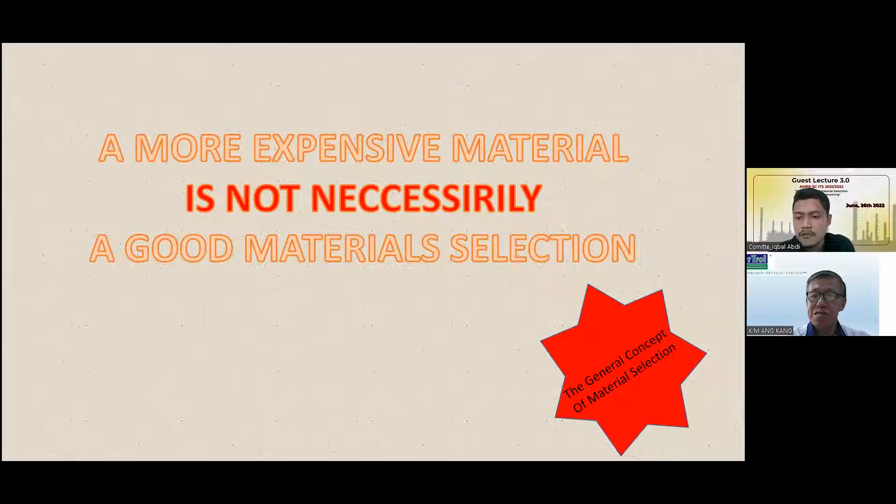Now, I would like to start this lecture with two stories first - real stories that I came across through 20, 30 years - with the hope that we can understand that when we want to choose a material, price itself will not really guarantee us that we have a good selection.

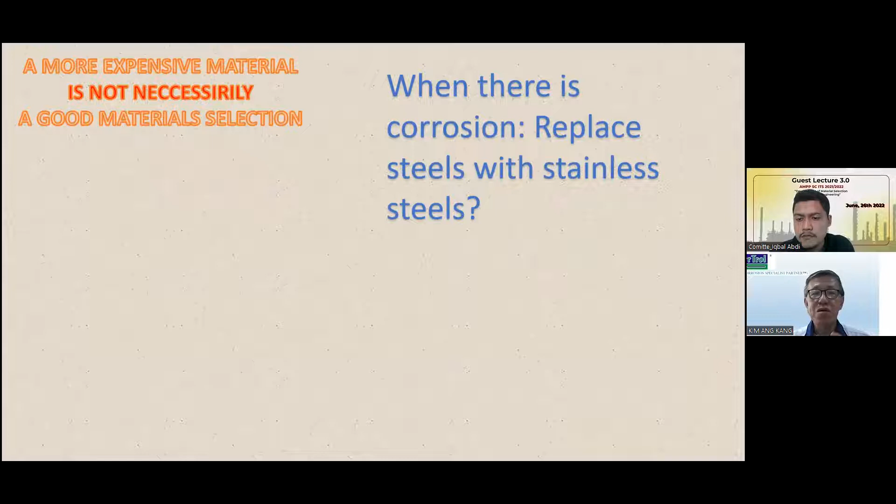So one of the common things we normally do, as a layman at home in normal life, we started by using steel, carbon steel. Whenever we have a problem with carbon steel, most of the time what we think of is to replace the carbon steel with stainless steel. So most laymen will think that way, and it's not really wrong. If we go back home, go to the kitchen, the dapur, we look at whatever we use made from carbon steel or mild steel. When we have a corrosion problem in the kitchen, we replace it with stainless steel.

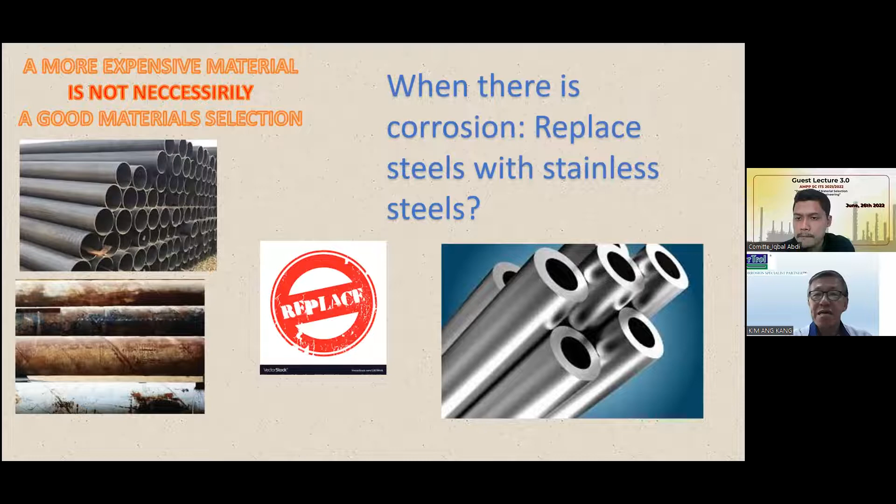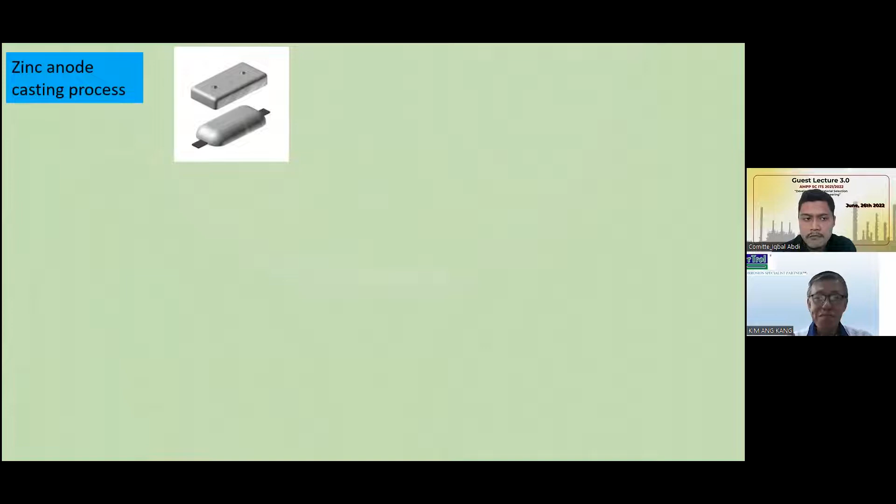Now back to this - the concept that a more expensive material is not necessarily a good material selection. Let me recall a real case story from more than 25 years ago, minimum. I was working for a CP company, and this CP company made zinc anodes. Zinc anodes are used for cathodic protection, and a lot of this application is on ship hulls. So the company has a foundry producing zinc anodes, and when producing zinc anodes, we have all this furnace and crucible - we have the furnace and crucible.

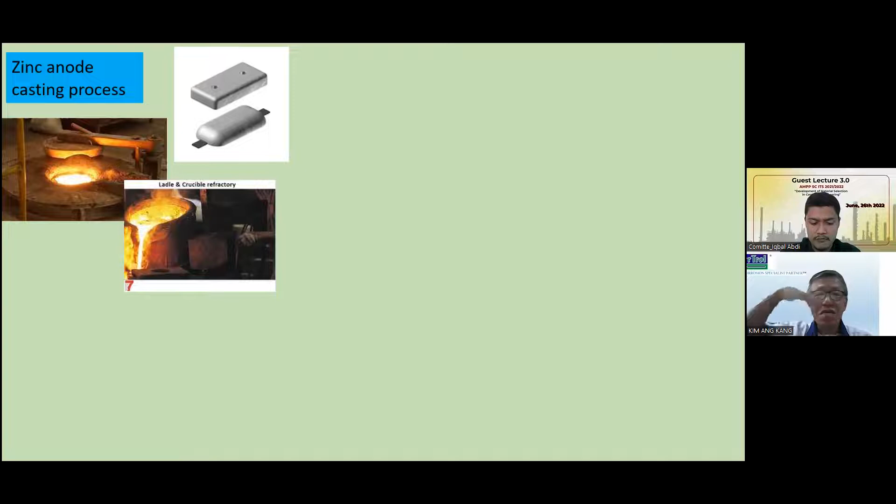Although we call the anode a zinc anode, it has an activating agent in it. So the anode, although we call it zinc anode, is not 100% pure zinc. It has an alloying element that we have to add in to activate the zinc, so that the zinc will act as the anode to sacrifice itself to protect the structure. So the common ingredient for zinc anodes is generally cadmium. So when we are melting the main part of the zinc ingot with cadmium, we need to do stirring. We need to stir before we can do the casting into the mold and make it into this shape.

Into this shape here that we can see. Yep, so to stir this, a metal rod is used. It's just like making the kue raya—we mix the anodes with the alloying element, using this stirrer rod to stir the molten anodes before we can cast into this.

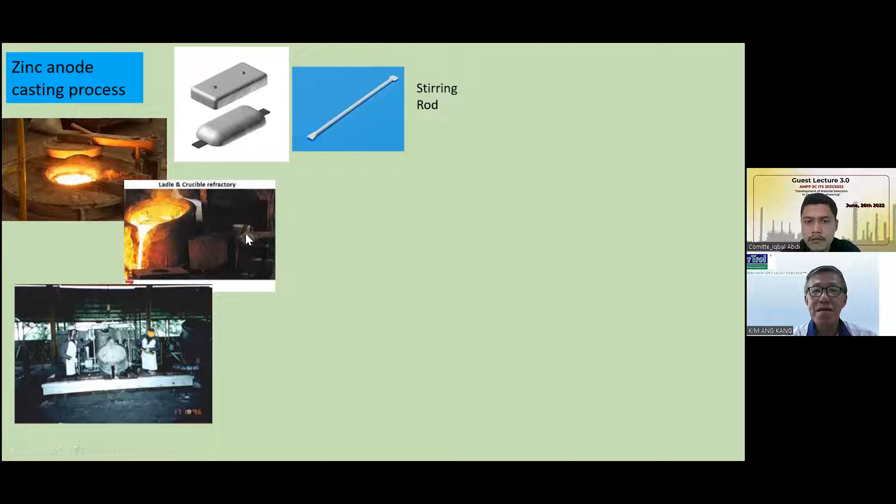So what happened during that time? The production manager was quite upset because the rod used to stir this molten metal was originally just a steel rod coated with some ceramic coating. He got upset because this rod could not last very long—almost every 10 times around, he had to replace it.

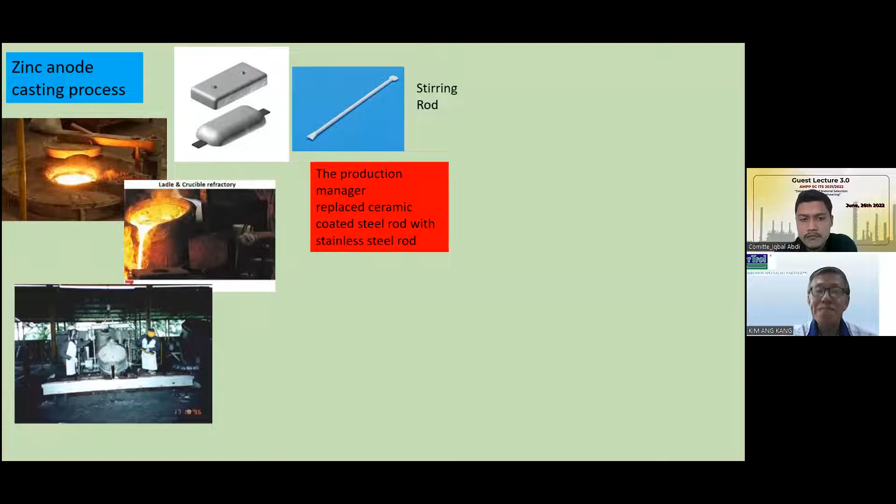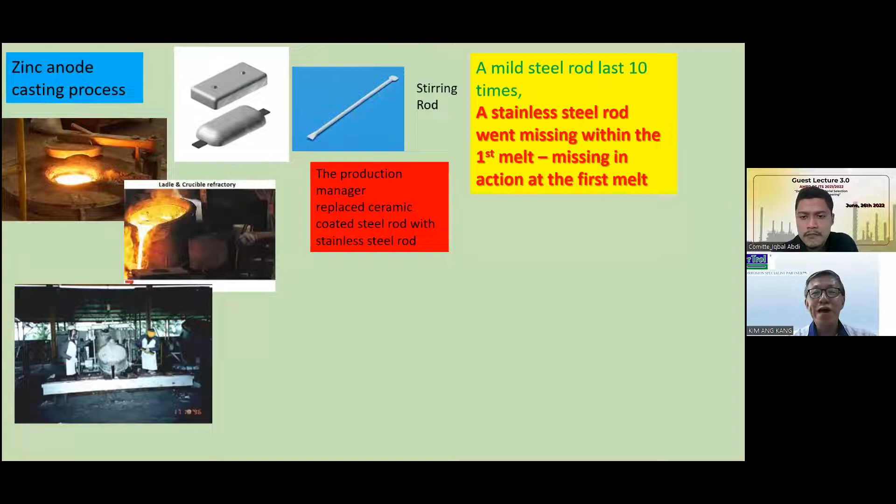He saw it as a corrosion problem. So as a common layman term, when we have a problem with carbon steel, the next thing we always think of is stainless steel. So he went ahead to find a stainless steel rod to replace the carbon steel rod. When he used the carbon steel rod, it lasted about 10 times of stirring. However, when he changed to the stainless steel rod, it went missing after just the first melt.

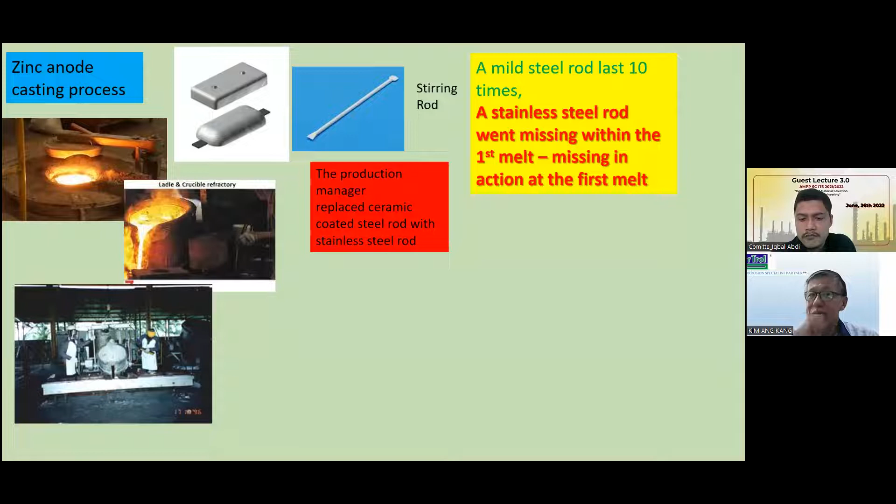So this is one example of the mistake we could easily make when we use a more expensive stainless steel to replace carbon steel, but end up with more disaster. This is one of the general concepts we always have to tell ourselves from the corrosion protection perspective when it comes to material selection: do not fall into the trap of thinking a more expensive material is always a better material. No—this is one example.

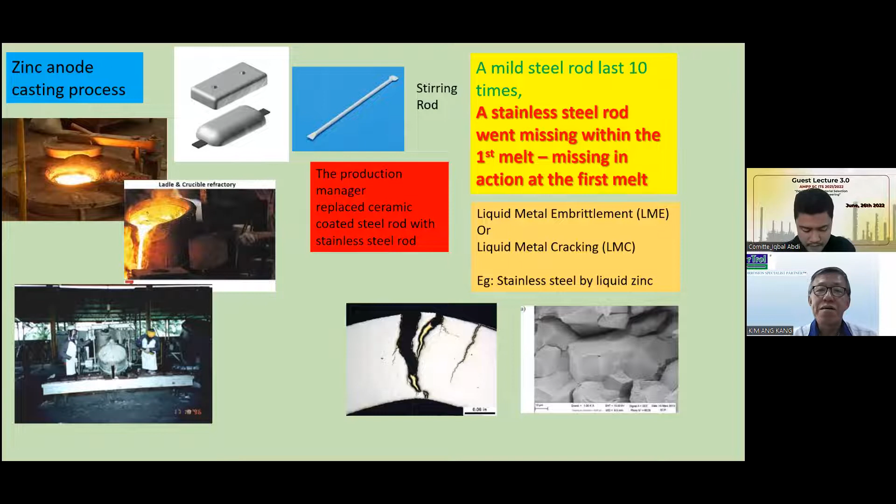Yep, so let me go to another second story, where it happens—this is also, sorry, a story from about 20-odd years ago. The real case happened when, one fine day, I received a call. It was quite early morning. I received a call from a friend with whom I worked together on one of the cross-country pipeline projects. We were together on the same project.

Then I left the company. He left the company after the project completed—I left before the project completed. Then he went to another company. One fine morning, he called me. His name is Mr. Chong. He said he had something he could not understand, so I asked him what happened.

He said he was involved in a new project building a petrochemical plant—an MTBE plant, actually. His project had storage of stainless steel piping at the open yard, uncovered, because stainless steel, in our general understanding, is not going to rust, especially under normal rainwater in temperatures like in Indonesia or Malaysia, where there's almost no difference in temperature and weather. So the stainless steel had no sign of corrosion at all.

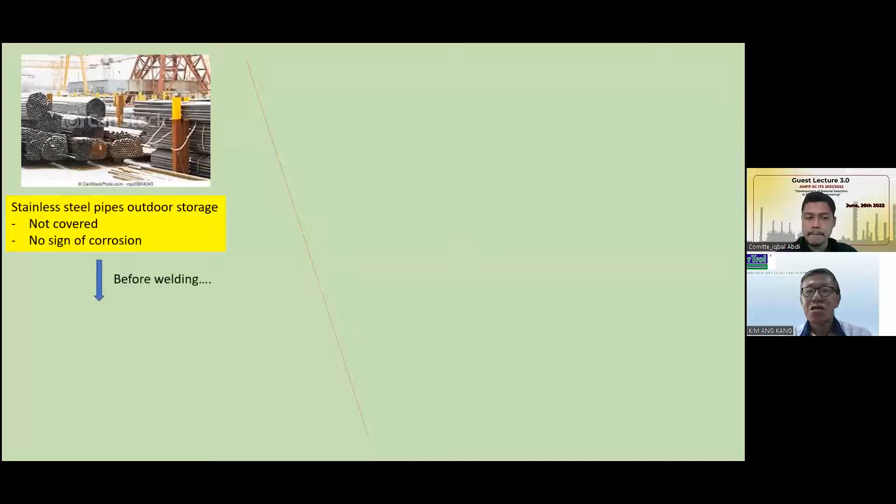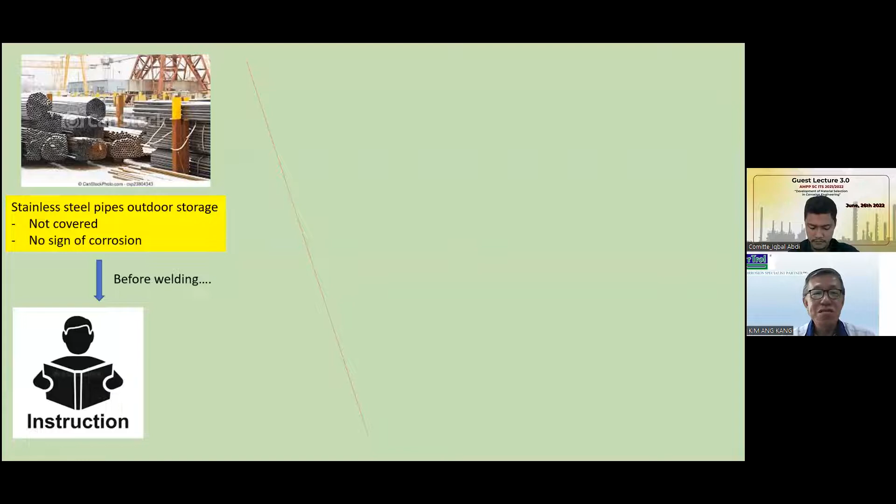So then, one fine day, they wanted to install the stainless steel. After the storage period, before the welding work began, there came an instruction from the project manager—an Italian project manager—instructing them that before they do the welding, they should wash the stainless steel with acid first, then wash the acid off.

Now, this Mr. Chong was puzzled. He told me that the stainless steel had no problem in the outdoor environment—those stainless steel pipes had no sign of corrosion at all. So what was the problem with just taking it and welding it? We just could not understand. But the Italian project manager said to wash it with light acid and then wash the acid off.

It was quite massive work for them to remove the piping from the storage deck like this, so he could not understand why they needed to do that. However, they didn't get a clear explanation from the Italian project manager.

Then when he called me, since I am in the corrosion line, he asked me, what is the explanation? What is the logic behind? Why do they need to wash this stainless steel when there's nothing wrong at all with this stainless steel?

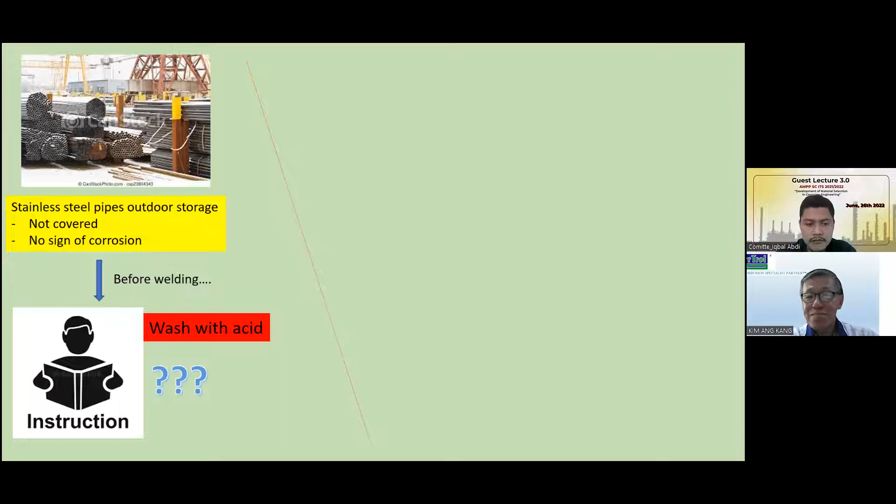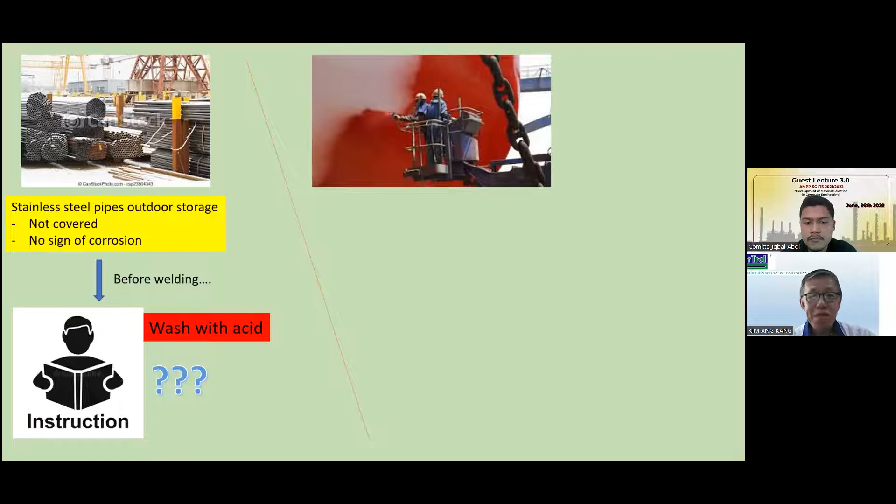So I started to ask him, because the stainless steel is stored at the open outdoor, whether the project has painting work or not. His answer is yes. There's painting work around that area. Then I asked him, are you aware any of those painting systems typically has a coating system started with zinc-rich primer?

Now, zinc-rich primer, if you get to know a little bit of protective coating in the industry, when we call it protective coating, it is referring to a corrosion protection coating. Because otherwise, when we think of painting, we just do decoration. Those are more decorative coatings. But protective coatings are mainly for corrosion protection. So one of the most common protective coatings contains zinc-rich primer.

So I asked him, is there any zinc primer that could possibly be applied inside? And his answer was not sure, meaning that it was possible. So I told him, if that's the case, you have to follow the instruction from the Italian project manager. The logic here is that the stainless steel has no problem. The painting itself has no problem. The zinc-rich primer itself has no problem as well. The problem will come later on.

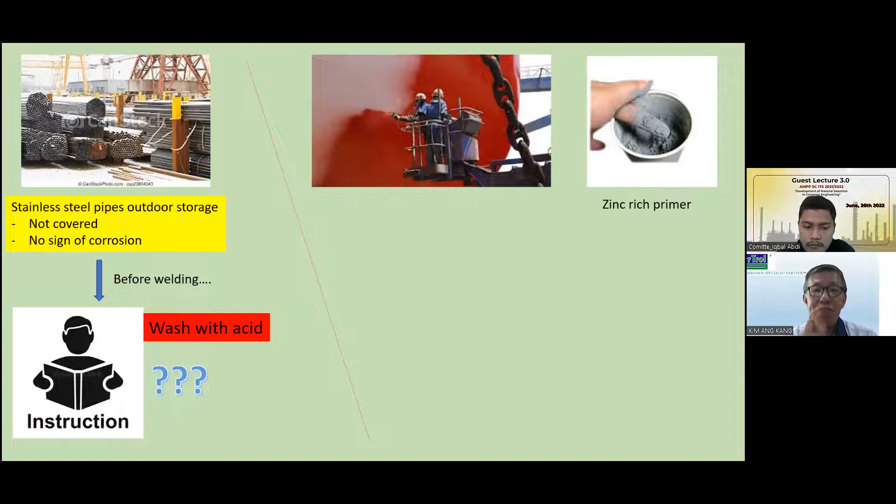Let's look at this. Zinc has a relatively very low melting point, about 420 degrees C. Now, when I want to weld the stainless steel, just a normal grade, because there is a long range of stainless steel grades, in general the melting temperature of stainless steel will be about 1,400 to 1,550 degrees C. To compare, stainless steel melts at 1,400 to 1,500 degrees C, while zinc melts at about 420 degrees C.

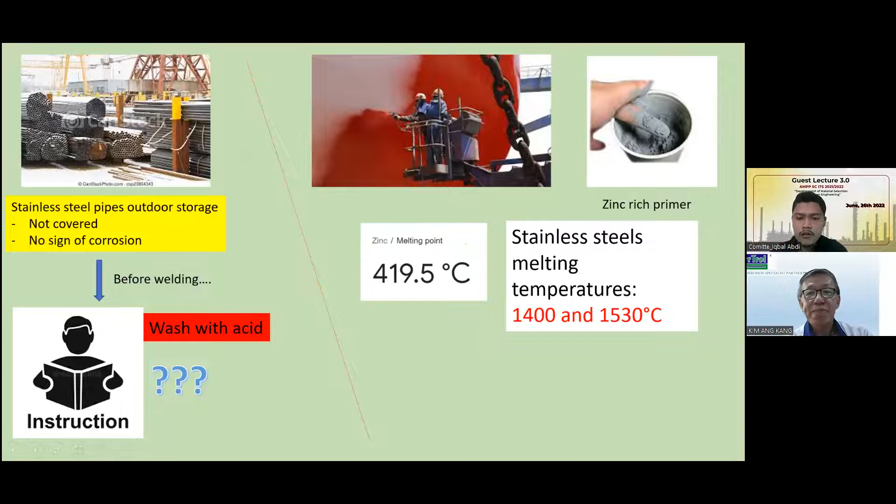Imagine the zinc dust in the zinc-rich primer, during spraying outdoors, flew over and deposited on the stainless steel. The deposition of the zinc dust on the stainless steel probably will not cause any problem yet. The problem is waiting. Imagine if we started to weld the stainless steel with the dust on it. What happens to the zinc dust?

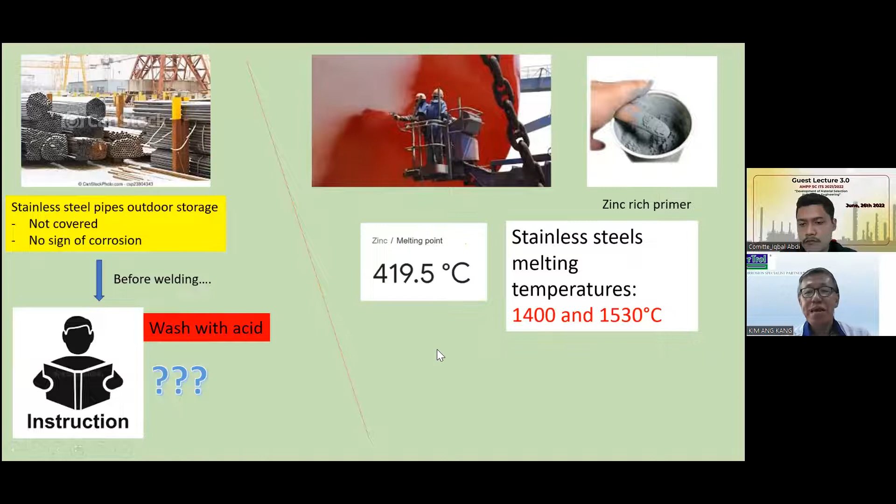It means the zinc dust will be melted before it comes to the welding temperature. Probably the preheat temperature is already enough for zinc to melt before reaching the melting temperature of stainless steel. So once welding of the stainless steel is on, this zinc dust will turn into liquid zinc. And that is where the problem comes, like what we watched in the movie Terminator 2, which symbolized a very typical liquid metal.

A metal in liquid form at atmospheric temperature, so far as I know, is only mercury. So that is another real case story: when we select materials, we have to be aware of things other than the material itself. We have to know what processes are coming around. So the Italian project manager gave a very good instruction before the problem happened.

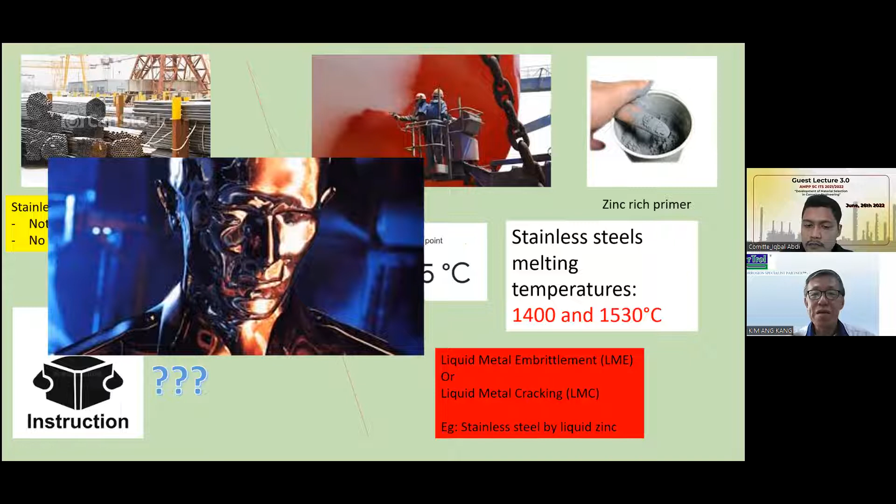In this case, we do not see the problem happen when zinc dust is zinc dust and stainless steel pipe is stainless steel pipe. The problem only comes when welding takes place on the stainless steel piping where the zinc dust could be deposited. So these two stories are just for us to begin with the concept of what factors and considerations we have to look at in material selection.

Now, in a very common view of material selection, these are the triangles of material selection that we'll consider. In the real industry, the bosses will be most particular about the cost. So we have to think of the cost, and we also have to think of how we can get these materials.

For example, like Indonesia now, you have a great advantage because of your nickel mineral reserve, where I was with Tigor on one of the projects in Sulawesi. We had a project in the nickel plant in Sulawesi. So we have to think of the availability of the material as well.

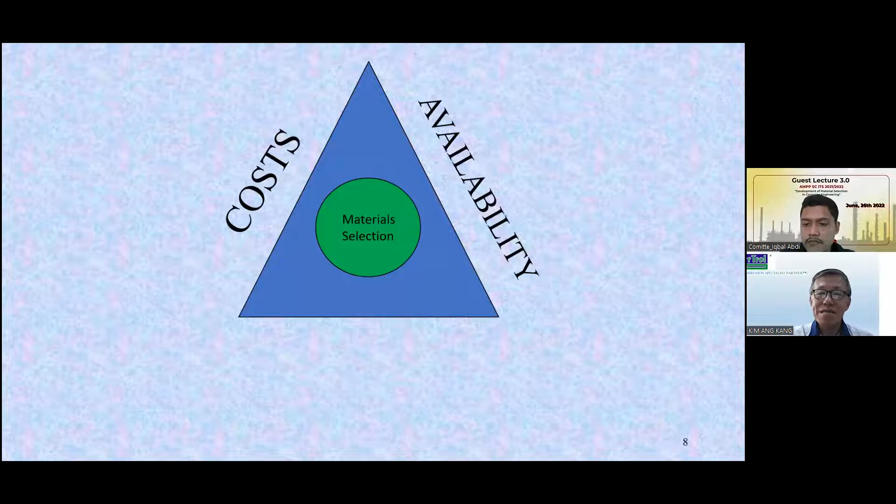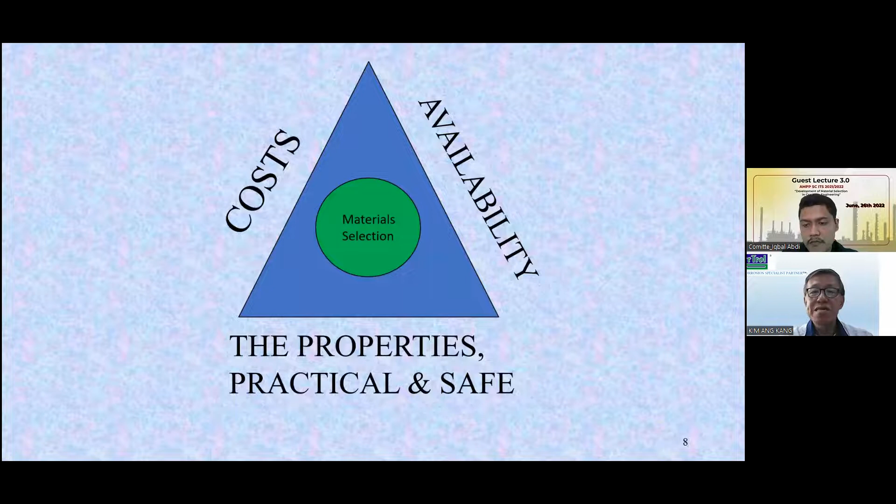And last is the practical part of it. We have to understand the properties. We have to understand the practicality of using these materials, and also have to make sure that this material is safe to be used in that environment. Safe in the sense that it will not fail unexpectedly. Safe also in the sense that it will not cause environmental issues, because now this has become more and more a key concern in a lot of engineering considerations.

Now, let's look at the cost. If we look at the cost of material itself, if we do not consider the cost, we just consider corrosion protection, let's take some example here. Now, most of the time, I and Pak Agus as well, and Iqbal and Tigor also, we are dealing a lot with pipeline. So this is one of the old maps of the pipeline within these few countries in Southeast Asia.

We knew that there are two pipelines going into Singapore from Sumatra, and also from your Natuna to Singapore, and in Peninsular Malaysia we have this cross-country natural gas pipeline, and over in Borneo we have the pipeline crossing over 500 kilometers. Not to mention what you have over Kalimantan and crossing over to the island of Java. So I was involved in one of them, I remember it's a 24-inch natural gas trunk line in Sumatra as well.

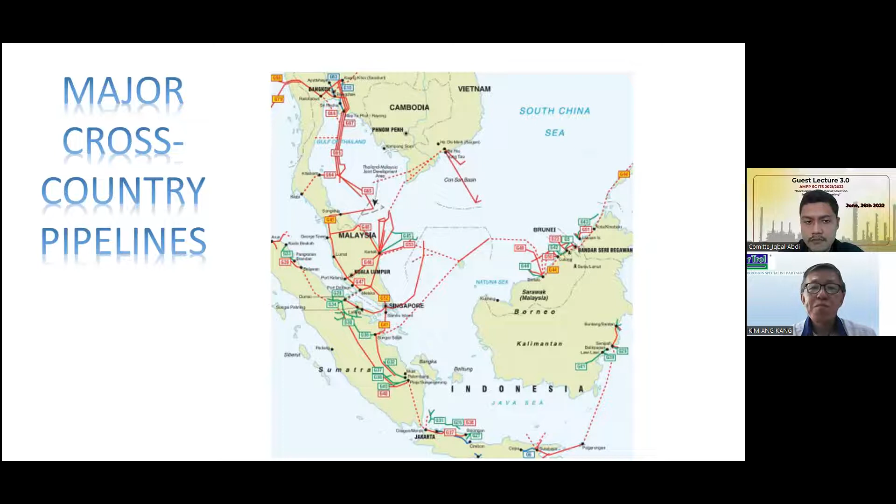So if we do not consider cost, just consider the corrosion protection, can we use gold, because we want to have corrosion protection, to construct this type of cross-country pipeline? Certainly in your mind, this is no. Otherwise, anyone who goes to cut a piece of this pipe will become a millionaire without working hard. So we say this is no.

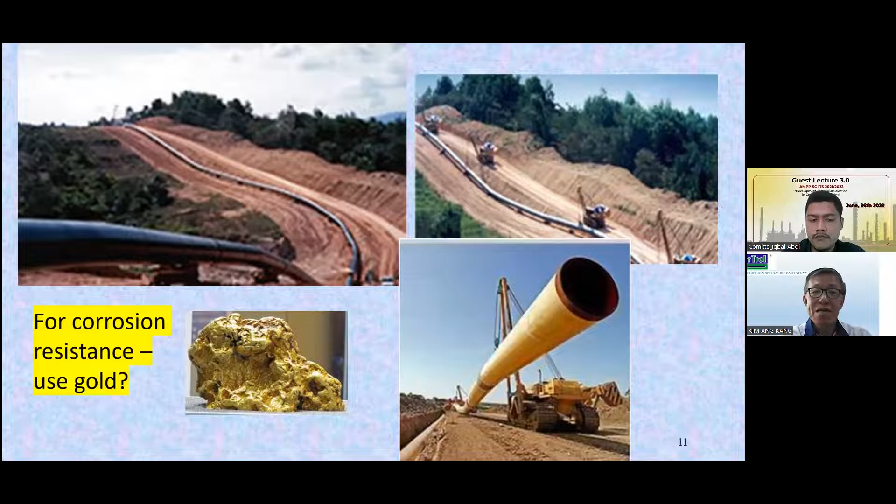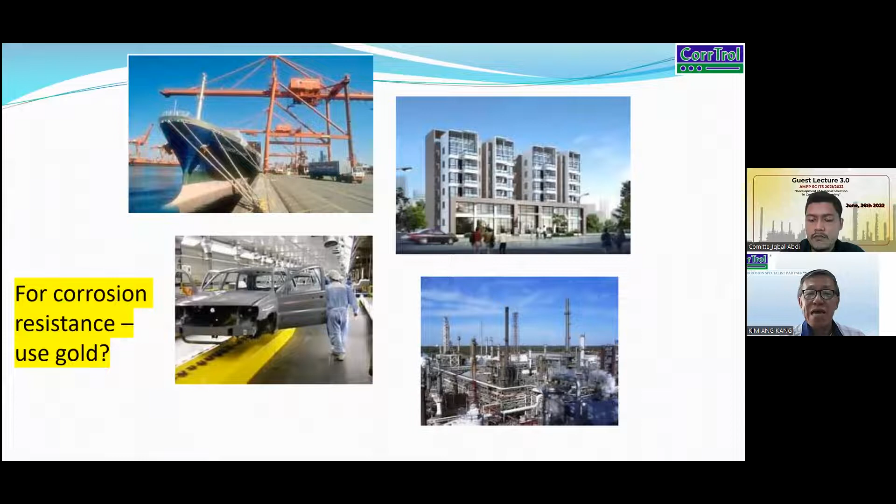And for other construction, as engineers, we know that we always have the challenge to make something happen within the cost, within the budget that we have. So imagine that these are the constructions that we are dealing with. And for oil and gas exploration onshore, we see a lot of this driving from Pekanbaru to Duri. Not to mention that both Indonesia and Malaysia have a lot of offshore platforms, and now those mega ports. If you go to your Batam Island, you have a big port over there.

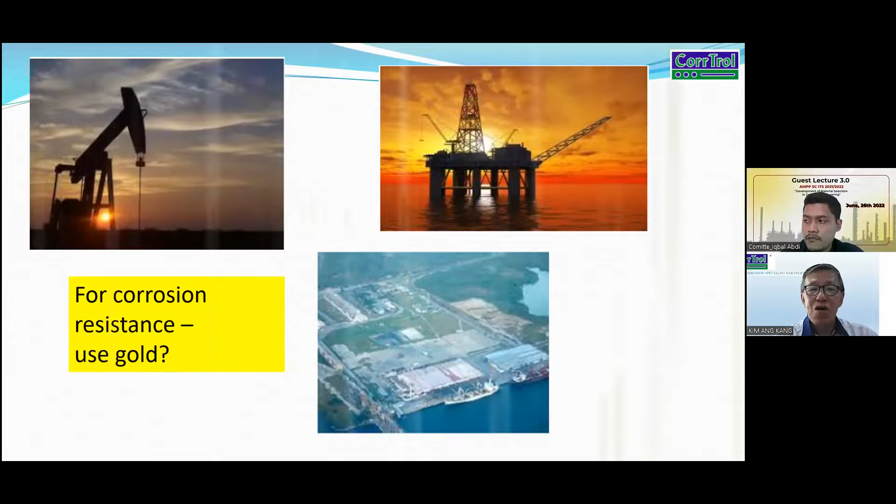So imagine, how could we afford to use gold just because we wanted to have corrosion resistance? So it is no. We always have to consider the cost that we need to incur to select these materials. Now, if the answer is no, what else should we consider when we want to do the material selection? For the cost factors, these are some of the things that they think of as cost.

First of all, of course, is the raw material cost, and the processing cost. We may have the raw material, but the processing cost could be very, very high, or the raw material probably does not need a high processing cost, but it could end up with a very high raw material cost itself. Not to forget, of course, the production cost and the production requirements: whether it involves welding, what sort of welding we need, what sort of fabrication we need, and the kind of manpower skill.

Welding is a huge process to be involved, with various setups. We have to make sure that this could be set up for the fabrication and the production of the metal. So we cannot simply say, I want that, when the whole production cost could be very, very high and impact the project cost. And not to forget is the life cycle cost, which means that we do not want to select something that is cheaper at this moment, but does not last long enough or meet the budget requirement.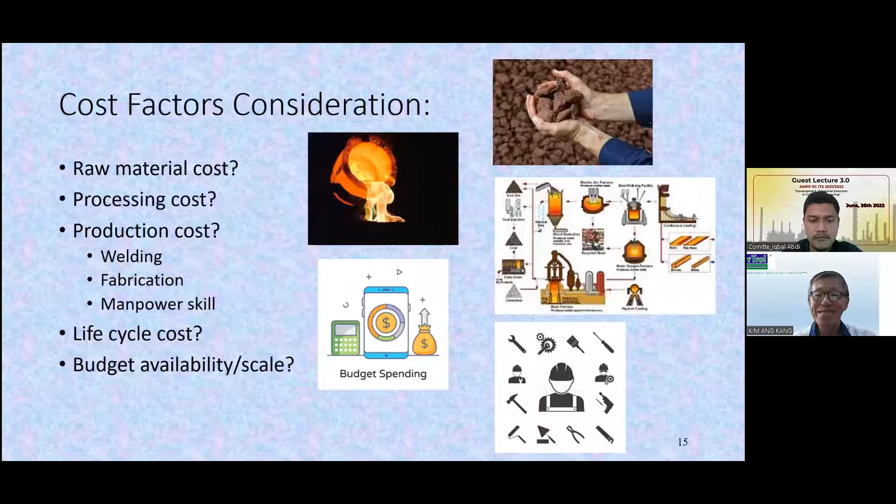So when it comes to availability, first of all, we have a project to meet. We cannot select materials where a project needs to be completed in 2 years, but this material can only be ready in 3 years' time. So we have to consider whether the material is ex stock or ready stock, and can the material be delivered or be produced within the project schedule. So we need to finish a project within time. That is the real world.

So at times we need to tailor-make certain parts to the size or the dimension or the shape of what we wanted to use. How possible can it be formed in terms of the size, the shape, the texture, the profile?

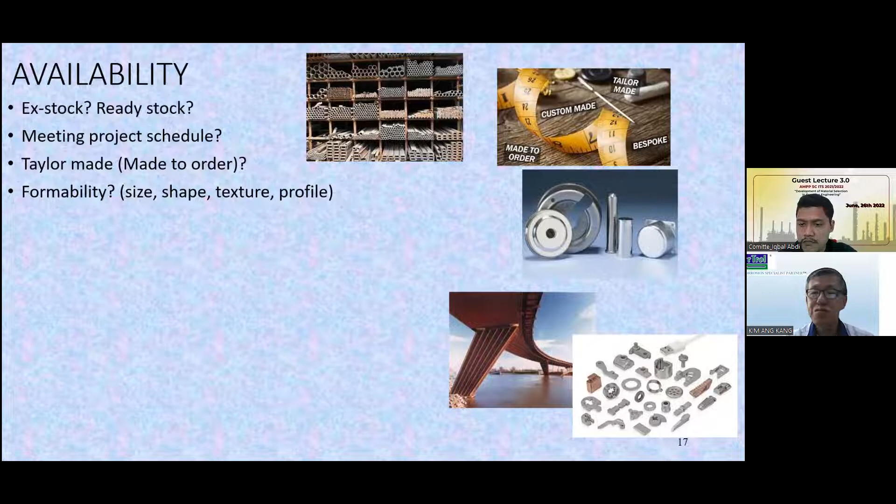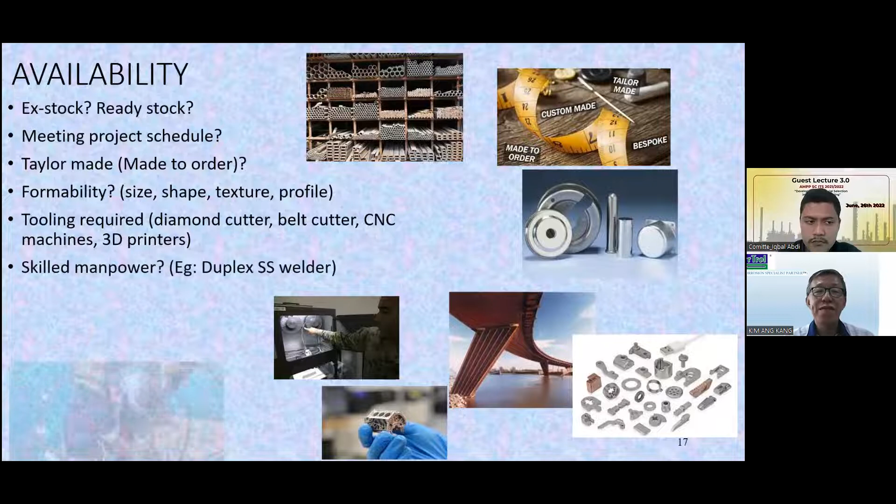And some of the parts could be that tiny. And sometimes we only want one piece. So the factory will tell us, no, we are not going to produce one piece for you, because a factory is a factory. So we have to think of any special tooling that is required. And now, especially with 3D printers coming about, a lot of small quantity orders could possibly be tailor-made too. So we have to think of whether this can be produced by the factory. If not, can this be produced using 3D printers? So these are some of the things we have to consider: the availability of the product, the parts and the material we want to select.

Now, the other one is the requirement of skilled manpower at the construction site. One good example is the duplex stainless steel welder. What I remember when I spoke with some friends, there was an incident before in the whole Southeast Asia where we could not find a qualified welder who could weld the stainless steel at site. So imagine if we select a material which is a good material, make sure not only of the availability of the material itself, but not to forget the availability of the skilled manpower. So if we want to buy a specified duplex stainless steel, in the back of our mind we also have to consider how that construction is going to be.

If that needs a welder, we have to think, can we get a welder to come in to do this welding or not? Worse still is if this is underwater welding. Underwater welding will have a lot more other factors to be considered at the same time, other than the material itself: the underwater setup, the depth where the work is going to be carried out, how to protect the divers from the pressure. So we need a decompression chamber to protect the welder from getting the pressure problem in the blood. I can't remember that term.

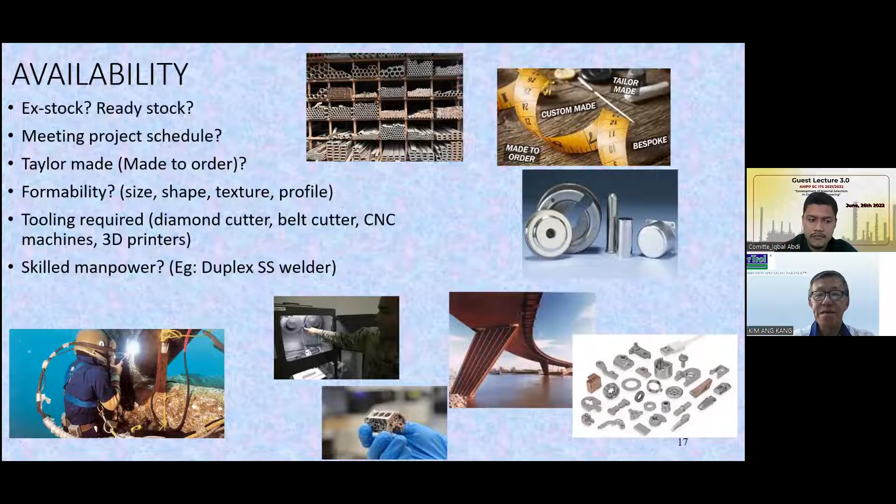So now, a more wider perspective to look at material selection is to look at the properties, the practicality, and the safety of these materials. So I have more slides here.

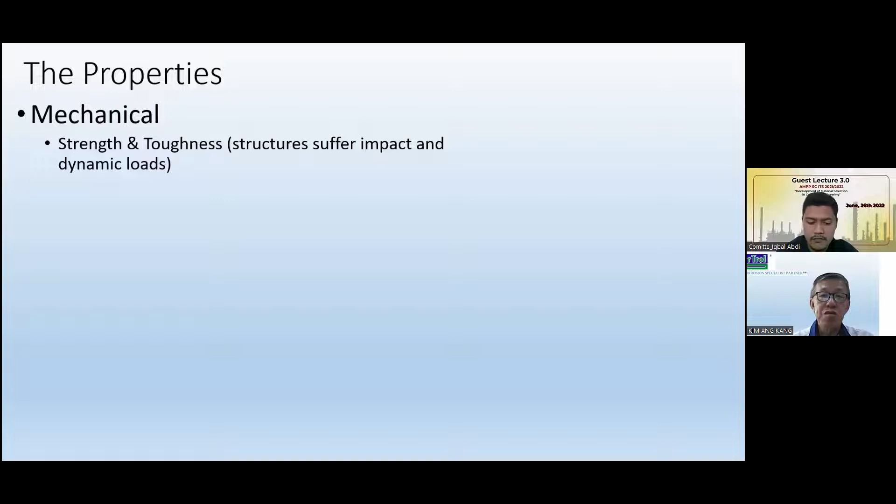To start with, there are various properties when we select a material, starting by looking into the mechanical properties of the materials. From the metals itself, we have to consider the type of strength, the type of toughness that we need for the structure, which are more prone to impact and dynamic load. Various testing could be done first - this kind of failures, the dynamic load on bridges, and the toughness on gears, on the pole, the toughness that we need, not to have something that will buckle after a short while. And whether or not, like a pipeline, could take the operating pressure - what kind of pressure we are going to operate this pipe with, and what kind of terrain we wanted to operate this pipe on, or where this pipe is going to be constructed.

For example, one of the very tough decisions to make is when we want to construct a cross-country pipeline like this, which needs to be very high pressure, but crossing very undulating terrain, meaning very mountainous terrain. So if we want a pipe which can sustain very high operating pressure, normally we go with higher grade, higher carbon content, so that it can take the internal pressure from the hoop stress. Hoop stress means that you just imagine a pipeline which is round - when we have operating pressure, it's just like blowing a balloon, so we call it hoop stress. We can have high carbon steel to hold the pressure of the hoop stress.

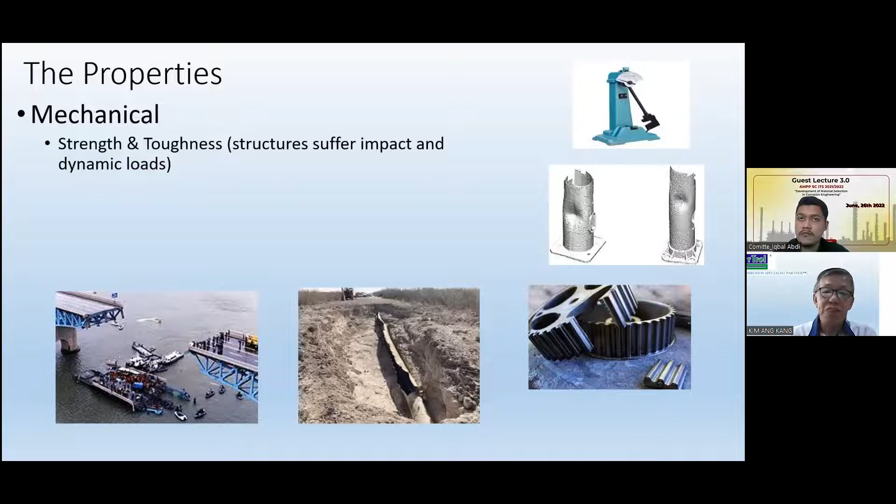So these are some of the properties when we want to select a material. Imagine that example I mentioned about the high pressure pipeline crossing very undulating terrain - so how to select this material so that we can serve the purpose while we want to transport the product inside the pipe with very high pressure, while the outside is experiencing such an environment of undulating terrain.

So other than that, another type of mechanical property of metal typically is the hardness of it. Hardness is how strong the material will resist deformation, like bending, scratching, abrasion, cutting, and so on and so forth. As materials students, some of you or mechanical division as well, one example of the hardness requirement is actually on our brake disc on the car. We need toughness, but because during braking there is always abrasion.

So how do we have a material that has the toughness so it will not break off, and at the same time when the brake pad abrades on it, it will not just wear off easily. These are some of the mechanical properties that we have to consider.

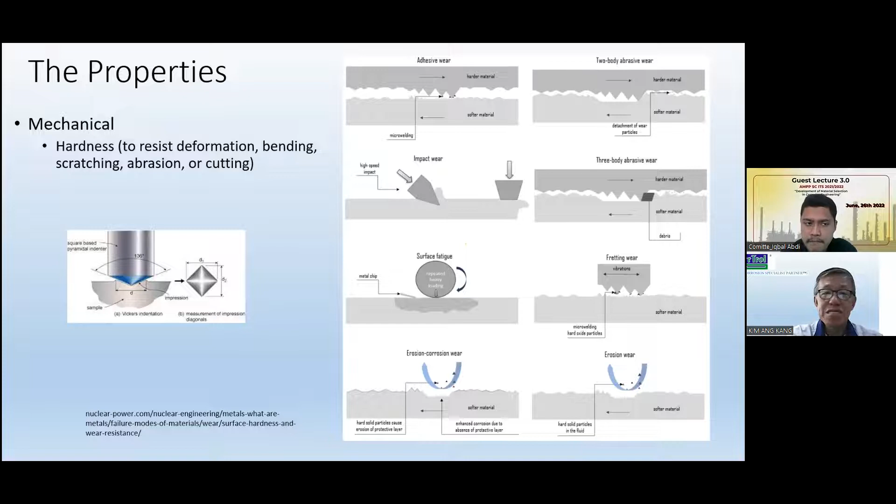So that is from the mechanical prospect. And not to forget, the other one is to look at the physical properties of the material. So physical properties could cover something like the thermal coefficient of the material that we use, or the thermal conductivity.

For example, if we are selecting materials to be used on the heat exchanger, we want it to be corrosion resistant, and which has good heat conduction as well. So we don't want to use materials which is strong to resist corrosion, but it cannot effectively transmit the heat.

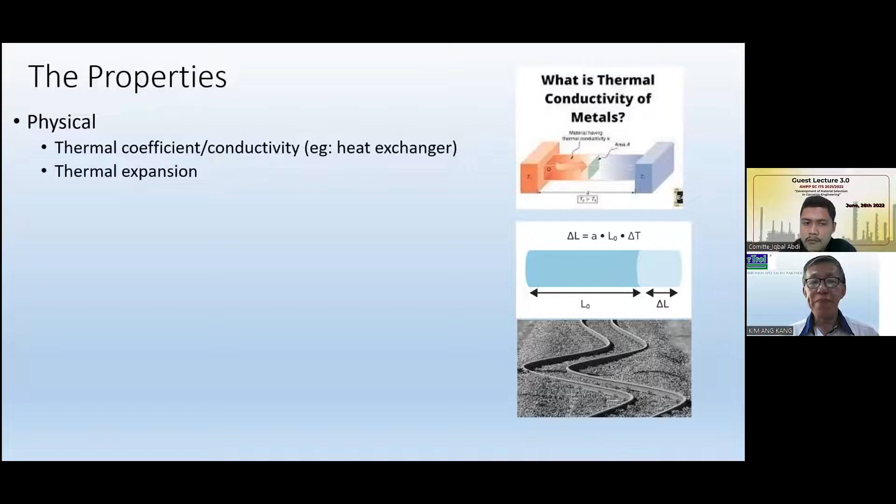Then there's thermal expansion. In the photos at the bottom here, we have to be aware that the material we choose will not end up like this due to thermal expansion. If we go to some petrochemical plants, when you have pipings around, sometimes you will see the expansion - we call it expansion release, or the stress release band. So those are something to do with thermal expansion.

And of course the electrical conductivity for certain materials that we want to use, we need them to have a good electrical conductivity, such as superconductors. Recently I've also watched another video - normally when we want to have a natural superconductor, we've got to have a super low temperature. But they are now being developed again in China for the future train using a superconductor, whereby they call it a high temperature superconductor. Of course, the high temperature mentioned is only relatively high temperature, it is still a low temperature, but this new material that's been used can still act as a superconductor, even with relatively higher temperature than normal superconductors. So that is the electrical conductivity.

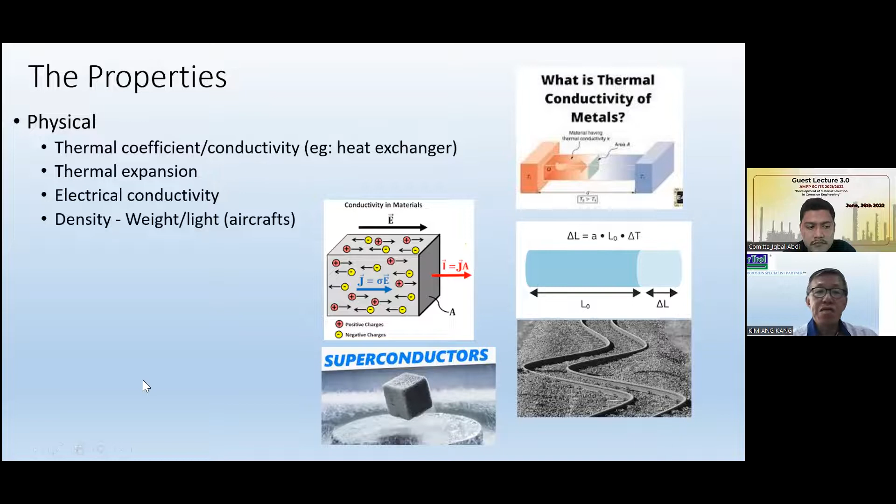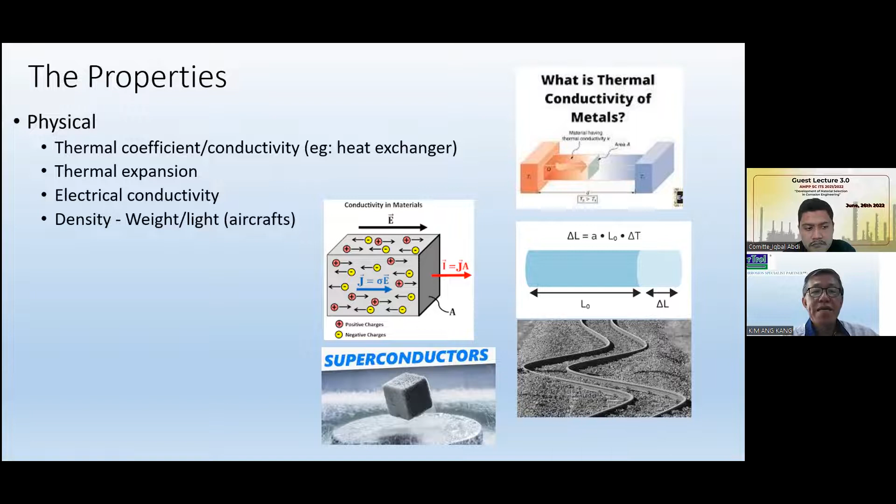And sometimes we have to select a material where we really have to think of the density of the material. One example, of course, aircraft is a typical industry where the density of the material is the main factor to be considered, because we really have to allow the aircraft to fly without the unwanted load on it.

So on the aircraft, the two most common metals, because of the density that we need to consider, first of all is the aluminum. You can see that the light blue area on this aircraft that I got from the internet mainly consists of metal, and most of these parts are really made of aluminum. And the aluminum used on the aircraft is commonly anodized - so it's not just the common aluminum that we use on our door frame or window frame. So those are the anodized aluminum.

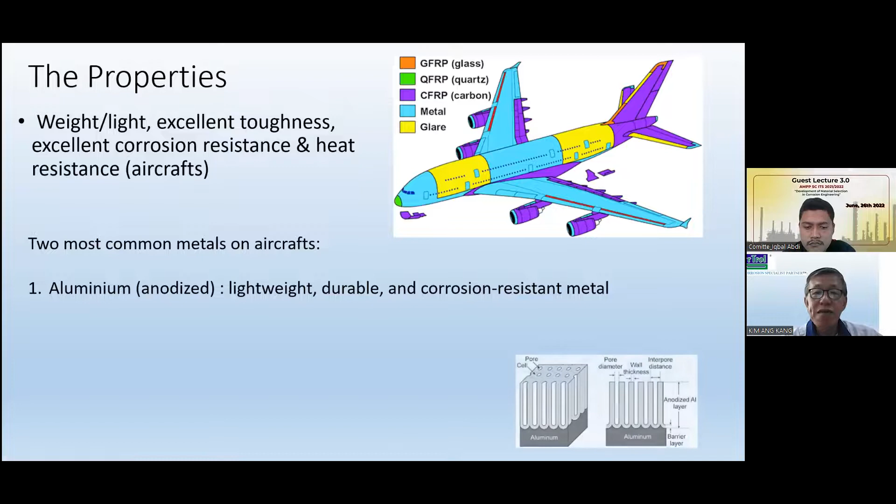If you do some research about anodizing, these are some of the processes that thicken the skin - I call it skin, but it's actually the oxide layer - to oxidize the outer layer of aluminum, which can then provide, first of all, corrosion protection of the aluminum. Secondly, it increases the strength of the aluminum a lot with this anodized layer. And the other benefit, because of the deflection of light, it can give some natural coloring as well to the anodized aluminum. So this is one of the most common materials used on the aircraft.

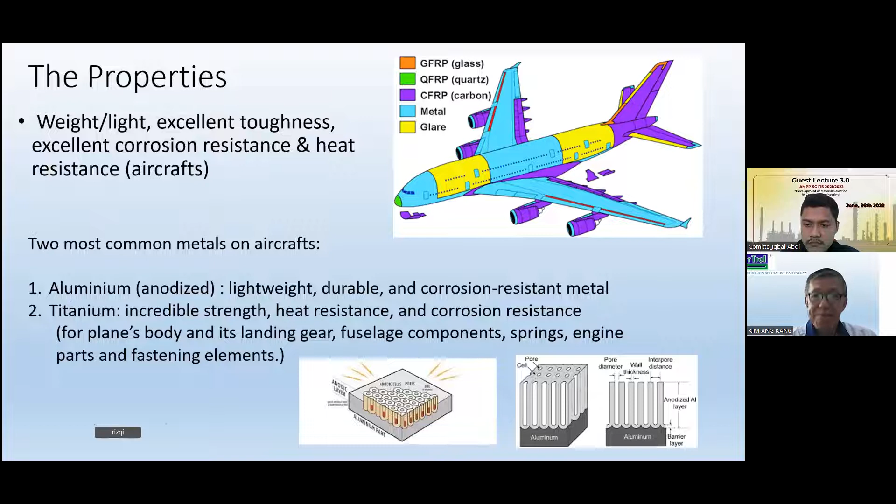The second most common material used on the aircraft is titanium. We know that titanium has properties of incredible strength, and the density is almost like aluminum, lightweight. And the other advantage of titanium is certainly because of heat resistance, so for the aircraft engine, that will be one of the good material selections. Not to forget that titanium also has very good corrosion resistance. And titanium has become quite a lot used as a base material for corrosion protection metals when we have a coated surface on the titanium. So this is where we look at material selection in the aviation industry.

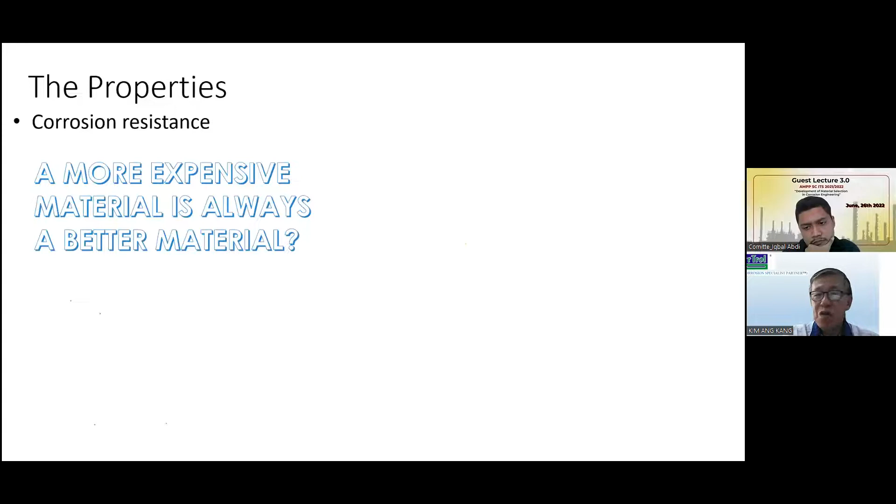So now, again, back to this one - a more expensive material is always a better material, we'll put a cross on it. When we want to consider the properties of a material from the corrosion resistant perspective, we do not just consider more expensive materials. So the materials that we select for corrosion resistance can be relatively much cheaper materials. It can be more compatible with the environment as well, so it could be sufficient resistance to corrosion within that service life.

And more importantly, these relatively cheaper materials can easily come along with preventive maintenance during the service life of the materials. So the preventive maintenance includes some of this - like we can consider a cheaper material coming along with corrosion protection methods, like carbon steel coming with proper protective coatings, for example.

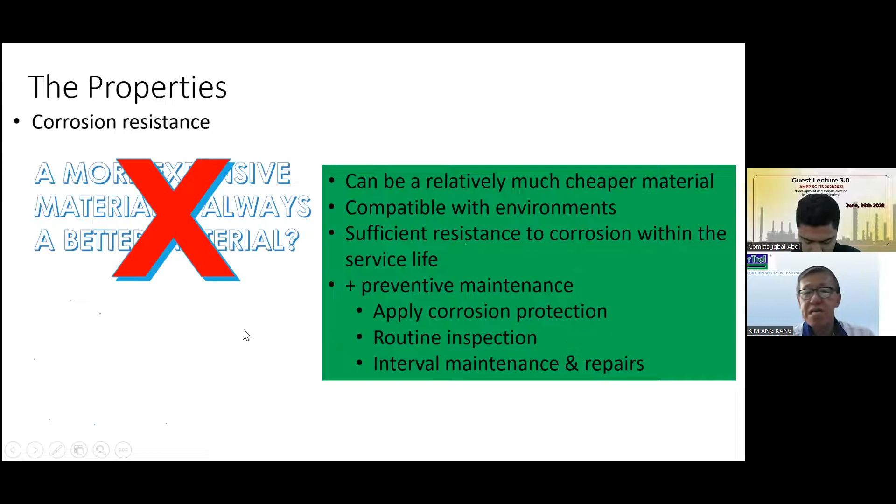We can also implement routine inspection when we use relatively cheaper materials, to make sure that before the failure comes to a terminal state that we cannot salvage it. Before it comes to that stage, with inspection we will know upfront and do any repair or mitigation. In between, with cheaper material we can also implement interval maintenance and repair. So this gives us an alternative than just selecting more expensive materials, from the corrosion resistant perspective.

Just about 2 hours before this meeting, I received a call from a project manager having a problem on cooling condensers where the coating has given way and they opened up the condensers. He has a lot of corrosion appearing, as we were talking about. He mentioned they have corrosion inhibitor dosage onto the cooling water.

Then other external factors can be the load - dynamic load, for example vibration, fatigue, various external factors, or even sagging of the pipe, like in offshore subsea pipeline operations. So sagging is always one of the factors taken into consideration for the pipeline.

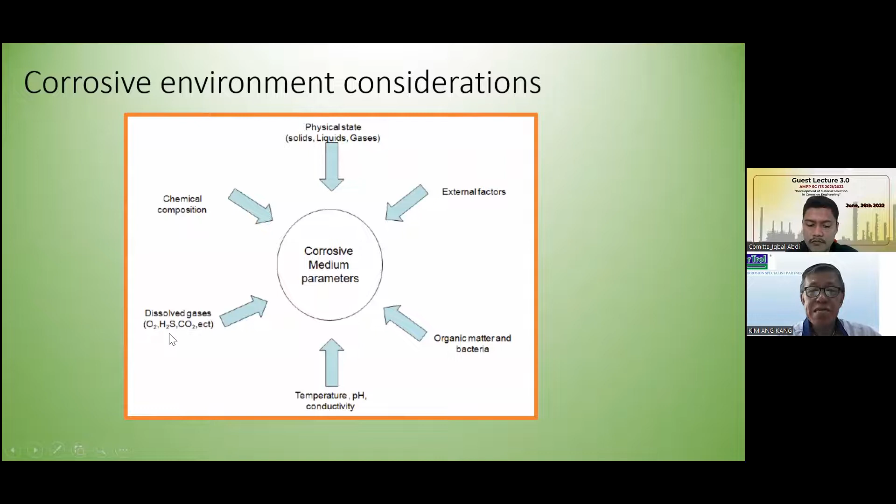And also the dissolved gases, especially gases like oxygen in some products, and certainly gases like H2S, hydrogen sulfide, which is one of the most scary culprits in the corrosion industry. Because that will really cause very scary corrosion, especially when dealing with stress corrosion cracking. Then we have to consider whether the material can sustain that hydrogen sulfide or not.

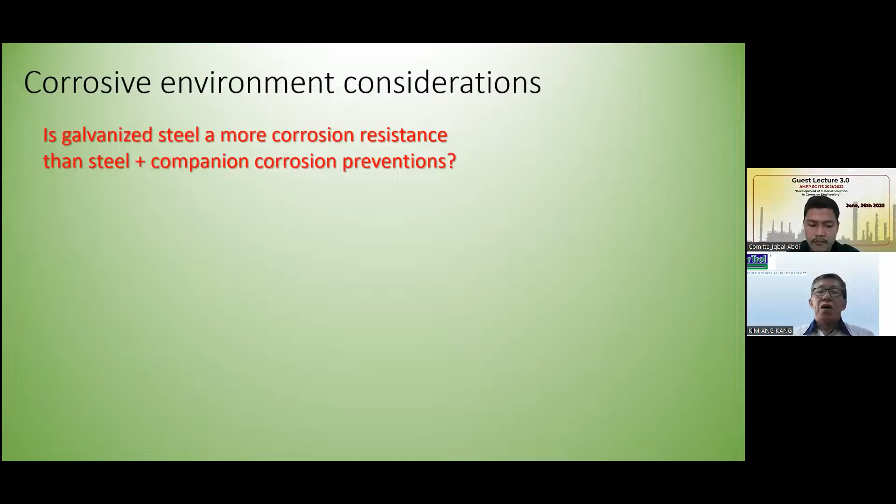Now, one example I'd like to quote is about galvanizing. I received a call many years back - a university lecturer was consulted on whether or not galvanized steel is suitable to be used for underground application. So the question is, is galvanized steel more corrosion resistant than steel, which comes with a companion corrosion prevention?

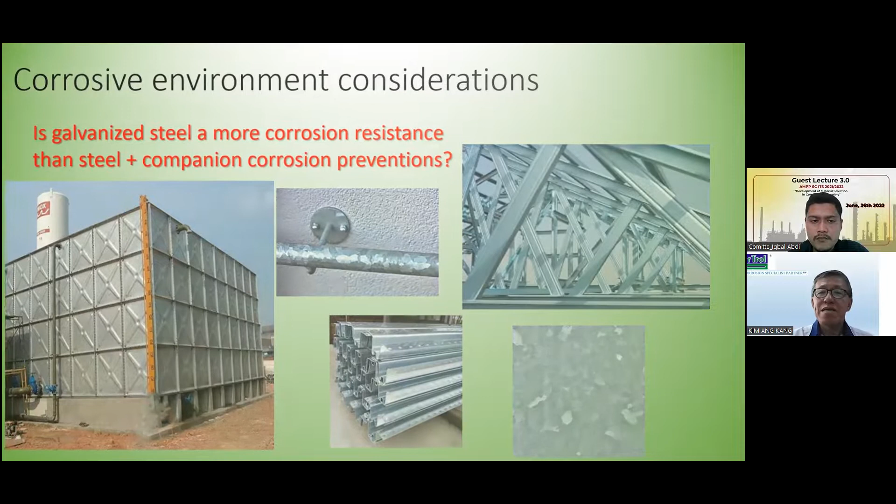So now, to look at this example, we're looking at material selection. If we take selecting galvanized steel as an example, we have to first understand the properties and advantages of this galvanized steel, and the disadvantages of it first.

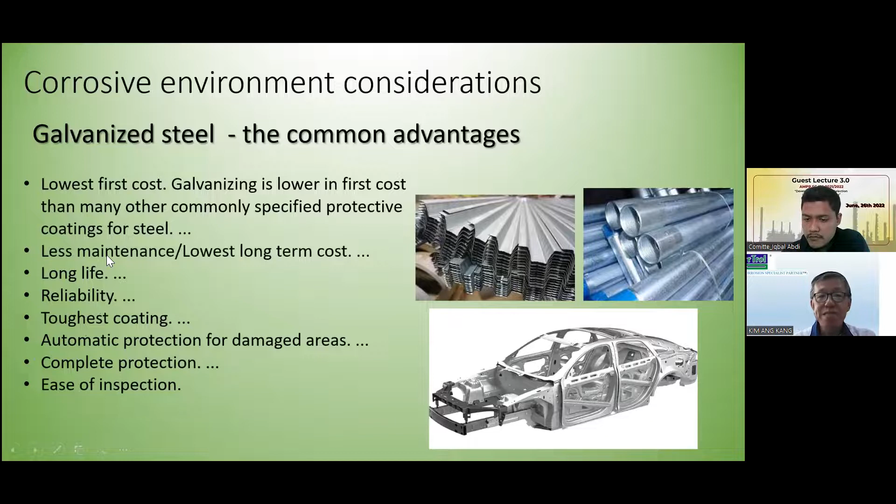Now, it is well understood the advantages of galvanized steel. For example, it is relatively lower cost because it could be produced from the factory. When it's produced in the factory, it can be mass produced, and the production cost is relatively low. And it has claimed to be less maintenance, with the lowest long-term cost when it performs well.

It has been classified as long life. Certainly we have seen some galvanized steel with long life. It is reliable, it is a tough coating because it's a metallic coating as compared to polymeric or organic coatings. So it's automatic protection due to a little bit of cathodic protection properties at the damaged area. It can give a sort of complete protection and is easily inspectable - even with visual inspection, we could inspect the galvanized steel.

So when we look at this, it certainly gives us a good idea that galvanized steel is a good choice. Some of the expensive cars, I don't know whether it's right or not, one German-made car has half of the frame actually galvanized, ready galvanized, like this. So that shows the advantages of galvanized steel.

But the thing is, all that has been described here is referring to the corrosion resistance and advantages of galvanized steel in the atmospheric environment. Atmospheric means open air, and it is not being covered.

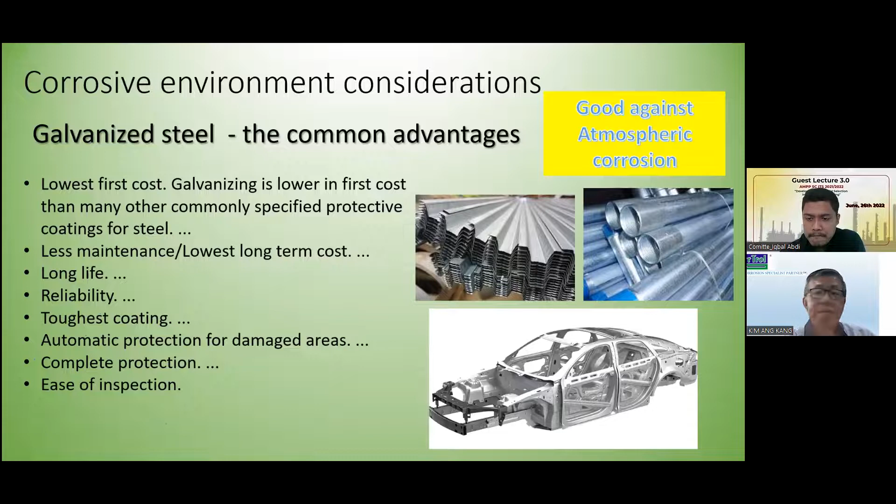So before we go further to see the advantages of galvanizing, now the disadvantages may come in. In order to understand the disadvantages of galvanizing, if we want to select it as a material, we need to understand these properties of corrosion resistance. Where does it come from for galvanized steel? Why is galvanized steel claimed to be corrosion resistant?

We noted just now in the previous slide that it is good in the atmospheric environment. Now, in the atmospheric environment, when galvanized steel's zinc layer is exposed to the environment, in the common environment where oxygen is easily available and there is flowing air, due to flowing air it gets moisture from rain, from dew, condensing on the surface of the zinc layer, because internally it should be steel. That's what we call galvanized steel, so zinc is only at this outer layer facing external.

So when the water, the wetness, comes in together with the oxygen, then it will start to form zinc hydroxide here. Zinc hydroxide is not a good product, sometimes we call it a kind of white rust. If we don't expose it to the air enough, typically when we have galvanized zinc sheets stacked on each other and water gets in, after some time when we open it up we'll see white spots on the galvanized steel. Those are the typical white rust that happens on galvanized steel.

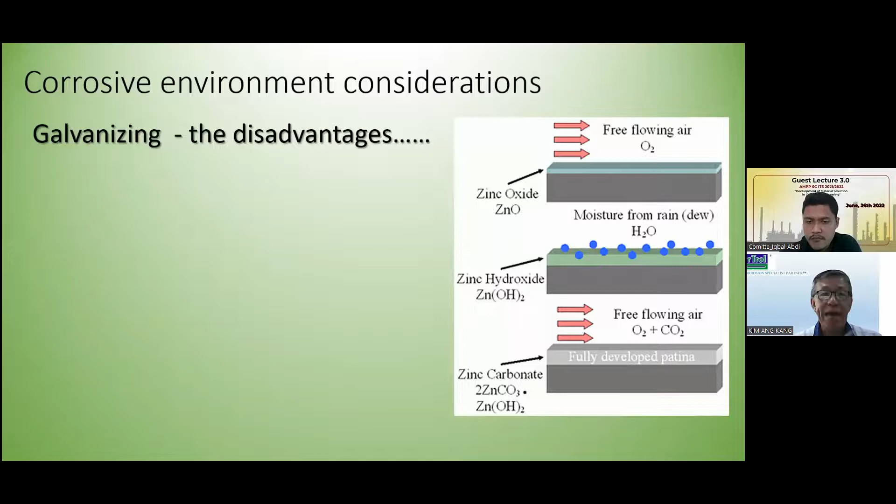But we must understand that this can only happen in the open, atmospheric environment, when we have free flowing air. However, if zinc is used for a different purpose in a different environment, the corrosion resistance of galvanized steel is very much dependent on the condition of free flowing air which will form the zinc carbonate. So if that condition is not given, it has relatively much poorer corrosion resistance when used in wet soil and water or seawater.

So when we want to use steel in wet soil and water, submerged in water, galvanized steel is not a good choice. So my answer to my friend who lectured at the university is that one should not expect galvanized steel to perform well when it is buried underground or submerged in water. Again, the environment will determine the performance of the material itself, not just the material. So it works very well in the atmospheric environment, but performs very poorly when it comes to being buried underground or submerged in water.

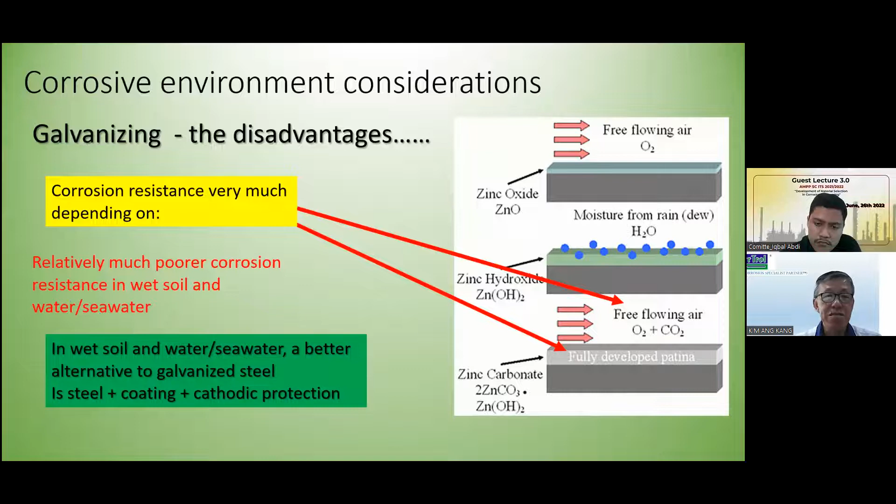So when it comes to wet soil and submerged water or seawater, a better alternative to galvanized steel is using just steel with a coating, allowing a reasonable percentage of coating defects or holidays, plus with cathodic protection. This will give a much better corrosion resistance performance as compared to hoping from the galvanized steel.

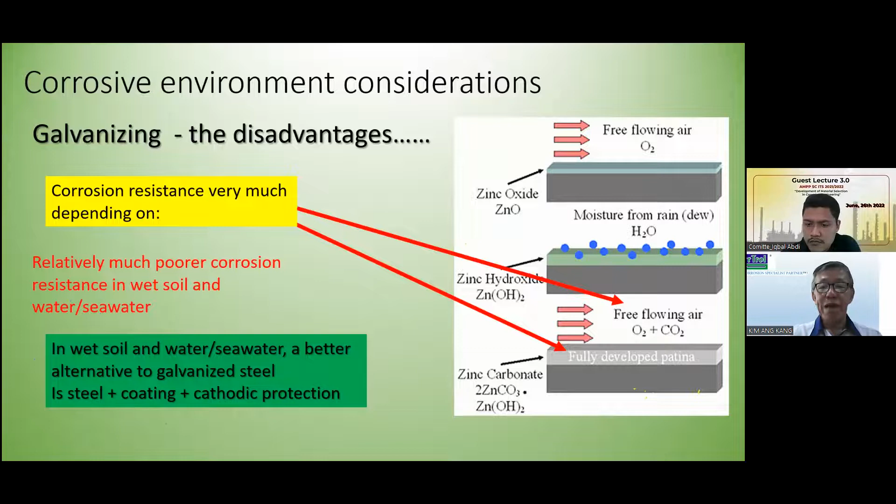So again, let's look at when we consider material selection. Some other considerations we have to really take into account, not just the material itself. It is not uncommon that we always come across a water pipe, above-ground water pipe, that we use to tap for the tap water.

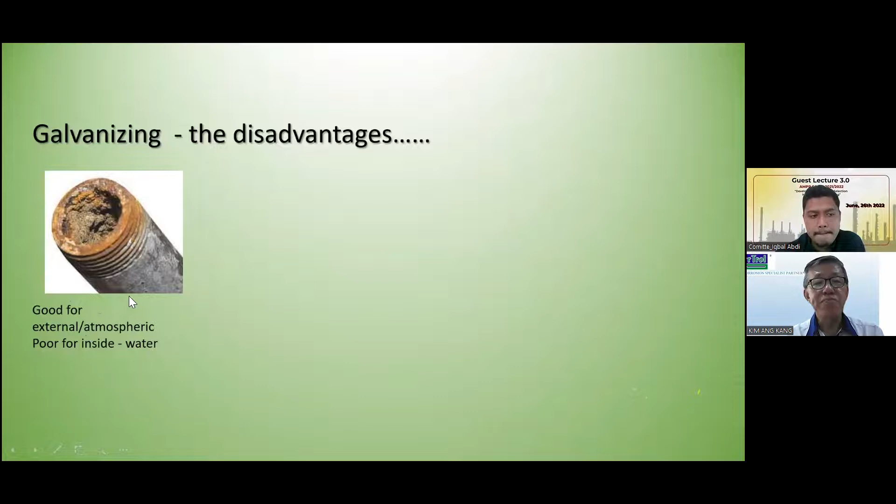Whenever we remove the tap water pipe, what we encounter on the external of the pipe, the galvanizing layer could still be intact and in very good condition. However, the internal, which was galvanized at the same time, shows this type of thick rust developing inside the pipe. So this is an example that shows good corrosion resistance for the external, where it is exposed to the common atmospheric environment, but very poor for the inside of this galvanized pipe because it is in permanent contact with water.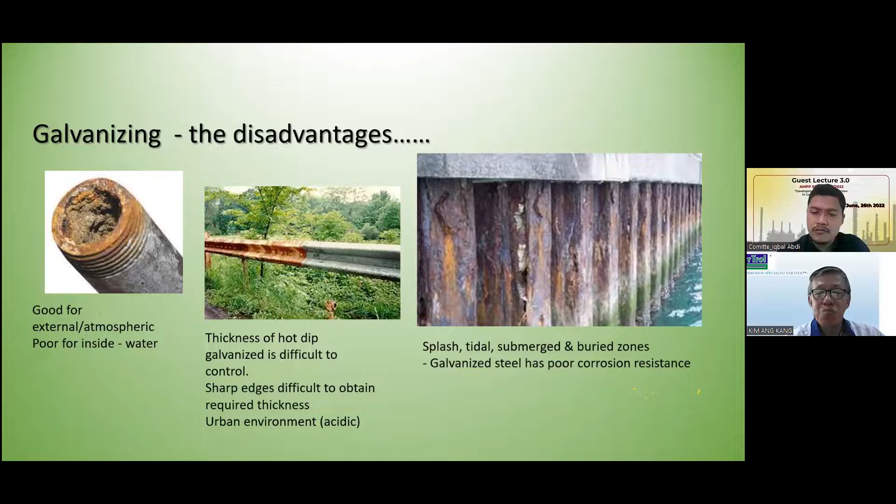One of the examples I would like to share with you also brings you to visit the historical city of Malaysia, Melaka. Let's look at how beautiful the river and the water activities around Melaka River are.

What I want to bring up here with such a beautiful scenery: looking down at the wall side of this river, because they wanted water activities where boats could travel up and down along the river, they installed a barrage gate at the river mouth so the water depth would be maintained to allow boats to travel along the Melaka River. To do that, they had to dredge the river and wall it with sheet piles. This sheet pile was originally made of galvanized sheet pile.

In a very, very short period, the corrosion started to show. This was one of the typical examples of wrong material selection for this kind of application. So now we understand that galvanized steel is very good for atmospheric corrosion resistance, but when it comes to submerged or buried conditions, or even intermittent wetness of the surface rather than just rainwater, galvanized steel becomes a very poor selection to go with.

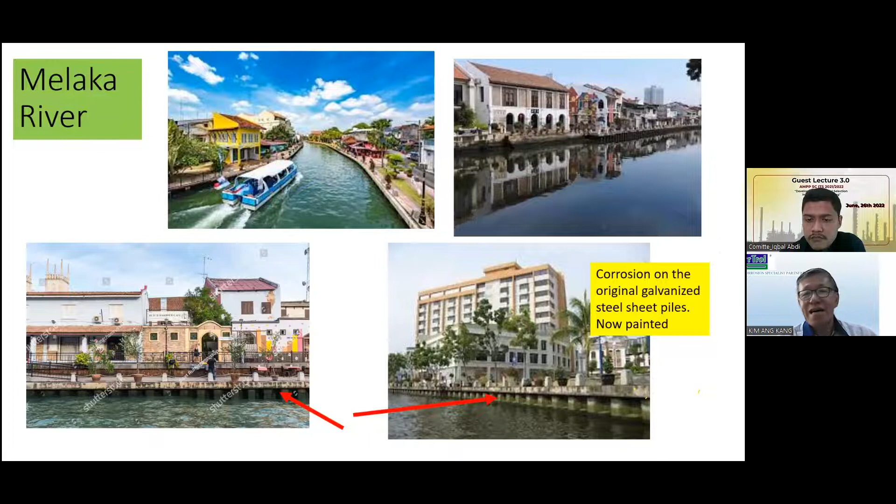So this is what happened in Melaka River. The corrosion on the original galvanized steel sheet pile occurred within a very short period, about 2 to 3 years, and they were then recovered and repainted using paint instead. So all the galvanizing was just wasted for this type of application. That is another example to share with all of you.

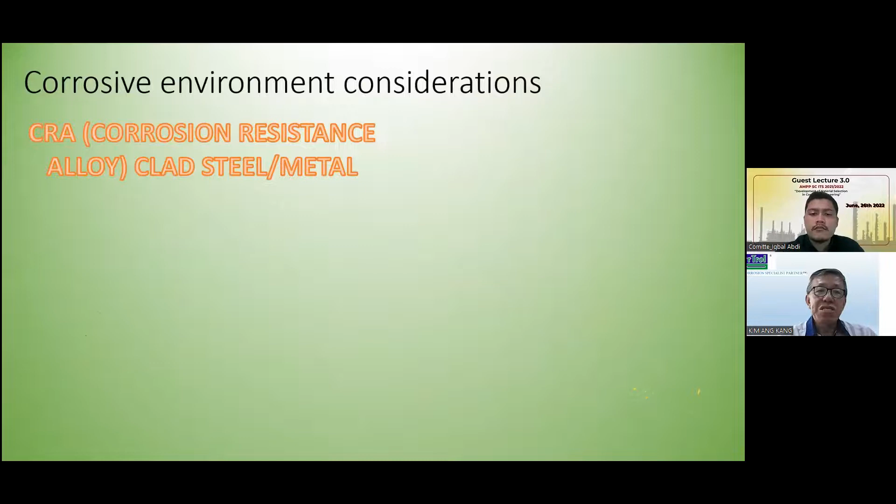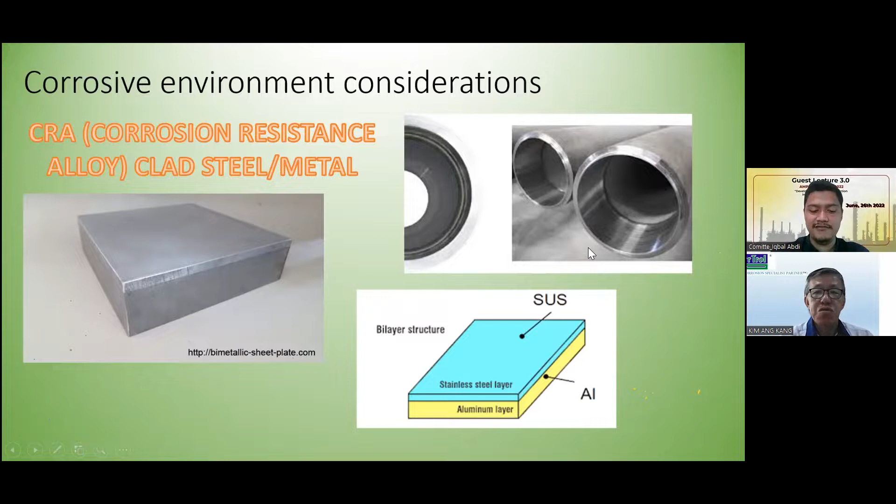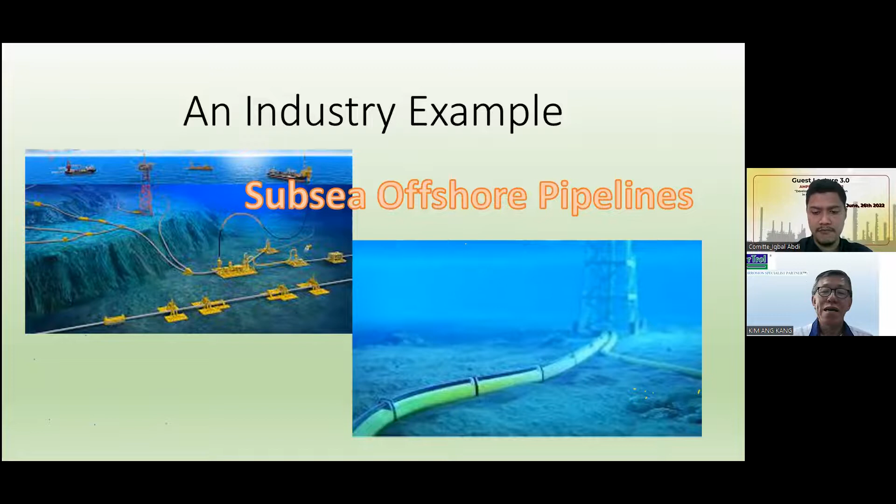And when a pipe is going to be installed under the sea with the seawater around, and it is sensitive to chloride, what do we expect from there? So now, in oil and gas production, we could end up with this situation as a problem statement. Inside the pipe, we could end up needing to carry sour gas, acidic gas.

There are jargons that we use in oil and gas. We call those products sweet products and sour products. In general, sour products refer to a more acidic product that we are dealing with, especially when we start to have a higher hydrogen sulfide content in the product. We start to have the sour product.

And now, if we want to construct an oil and gas pipeline which is going to carry a product which is acidic, normal carbon steel cannot sustain the acidic environment. If we use carbon steel to carry the sour product, the steel pipe will not last. So we have one problem. The next thing we think of: can I go with stainless steel, which is good and resistant against the acidic environment?

One of the solutions used in the industry is to have a corrosion resistant alloy, or CRA, like stainless steel or different grades of stainless steel for the internal, and then we allow carbon steel to be the external, along with coatings and cathodic protection to fight against corrosion by the seawater. So in this case, we solve the problem that we face here.

We have the internal with the CRA, which is sustainable against the acidic environment, and the external of carbon steel with coatings and cathodic protection against external corrosion from the seawater. This is another concept of material selection that we speak about. So those are some of the examples and factors that I could share with you all in terms of material selection.

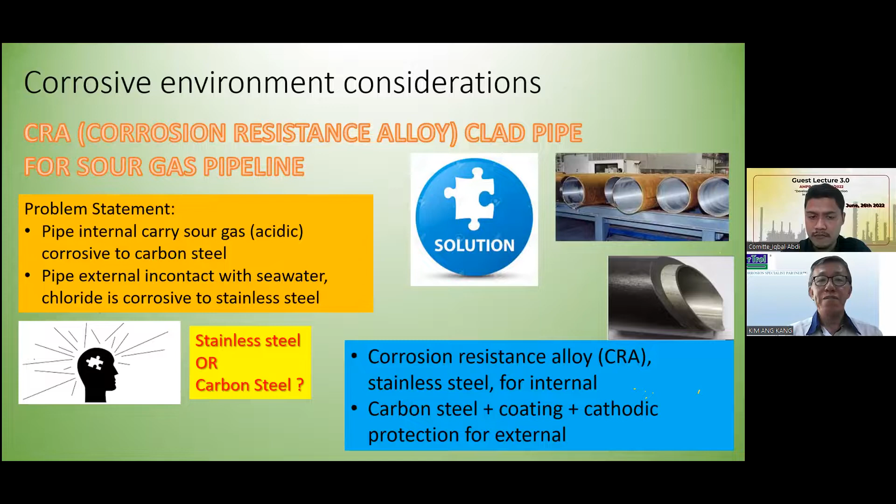But it often comes to another question. So after we have considered all of the suitable materials for the suitable environment, what else do we still have to consider? So I have an example here from the photos. We have selected good materials from all the considerations earlier. But now, what else do we need to look at?

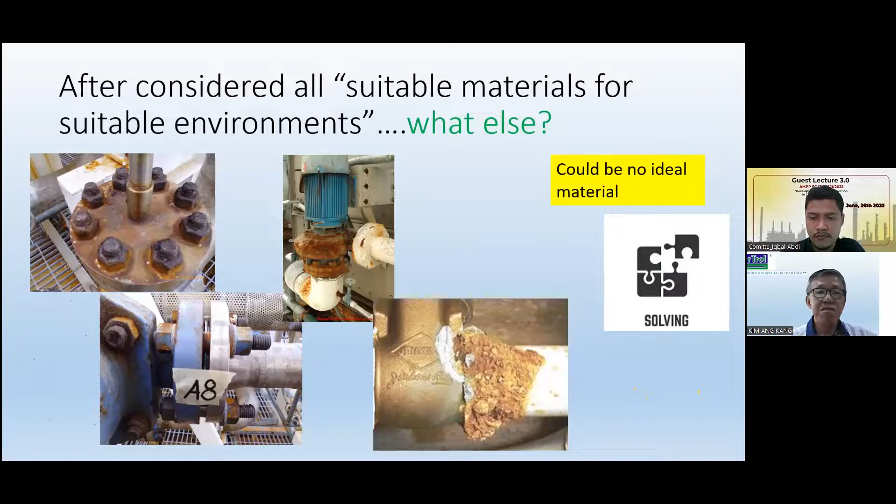So it could be that there is no such ideal material to be selected, really. Although we discuss material selection here, what materials are sustaining or most suitable to certain environments, bear in mind there will be situations where there could be no ideal materials at all. So what do we need to consider then? This is the last slide that I have here.

Other than considering suitable material for a suitable environment, I personally think it is important, from the corrosion perspective, first of all to understand the various types of corrosion, and what has caused them. For example, crevice corrosion, galvanic corrosion, fatigue corrosion.

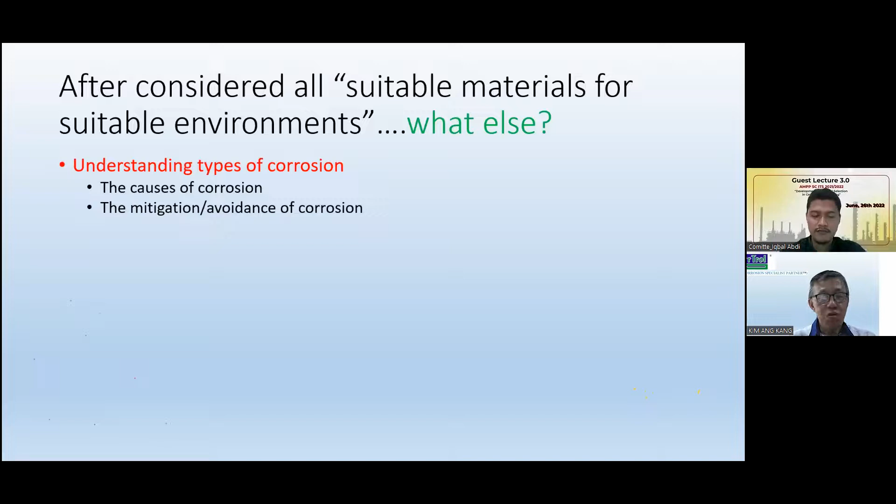So we have to understand what these corrosions are and what causes them, and look back into the material that we select for the particular project we are dealing with. What else do we need to be aware of before we really go ahead and use the materials? At the same time, look at the causes of this corrosion. Can that corrosion be mitigated or avoided?

Other than that, we also ask: what other corrosion protection methods can we use as a better choice? We do not need to tie our hands and limit ourselves to selecting materials. We can also look into other corrosion protection methods to apply at the same time, if a single selection cannot satisfy all the requirements we have.

We can also ask: is interval replacement of parts a more realistic option? Sometimes, no matter what material we use, the material will still degrade or corrode. So if a part can be easily removed and easily replaced, then possibly use a less corrosion-resistant material, but replace it from time to time.